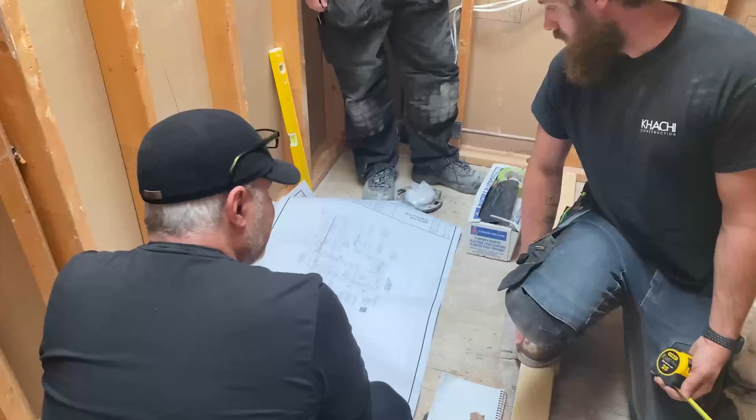Let me give you a recap of where we're at right now. The kitchen design is done, and I feel great about that. There's some refinements to be done, but we know the direction we're going in. The bathrooms have all been designed, and that's complete, so that sets us up for the finishing details. The house is framed, and that is why it's so important right now to get onto the electrical layout and some of the other components that are going to end up inside the walls.

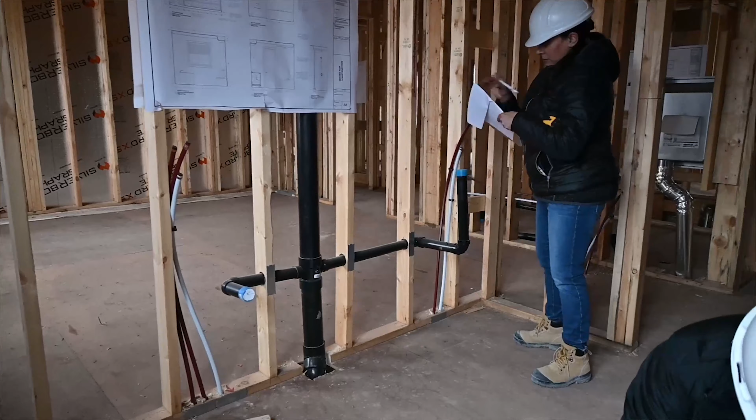Last week, I had a rep from Nuheat out to the house to walk through all the bathrooms because we're going to use the nVent Nuheat system to heat all the floors in the bathrooms. Why? I love the system. It is so easy to use. You get a perfect fit. It's designed for the space. You get even heating underneath your floor tiles, and the system is built in the factory for your bathroom.

So there's no guesswork of figuring things out on site, how you space the wires. It's all factory designed for that space, which is really important. It gives it longevity, great performance. It's very thin, so it doesn't affect the height of the space.

We're going to put a programmable thermostat on each system, and you're going to have remote access to that system. You'll be able to program it and have it go on when you need to, so you get great comfort. What I love about in-floor heating, especially the nVent Nuheat, is that you can zone your spaces. So now you don't have to warm up the entire house in the wintertime.

If you get up early, you can warm up that bathroom and go get ready without really heating the entire space, and off you go. Everybody else may wake up two hours later, which means you can then prolong the start of that heating cycle and save yourself money. It's quick, it's easy, and that's why we're using it.

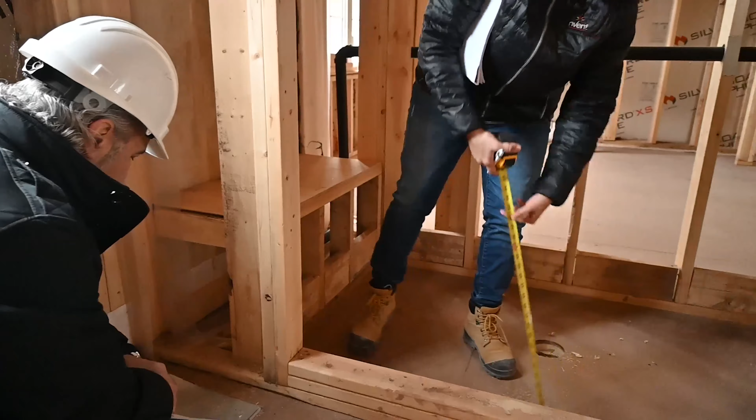So it's designed, we know what the layout is in all the bathrooms. We're also heating all the shower stalls. There's nothing worse than having a nice warm floor and then stepping onto a cold one, so you want to make sure you don't create that scenario. If the bathroom floor is heated, we walk into the shower and it's heated as well, so you get nice consistency.

We also met with Kelly about the alarm system, the cameras, and some of the low voltage stuff in the house. Kelly from APCO Alarms made some suggestions, and we're going to go with a full out alarm system that includes glass break sensors, motions, contacts on all the doors and windows, plus smoke alarms and carbon monoxide detectors throughout the house, in addition to the ones the electrician puts in as per code.

The reason I like that is that if you have a smoke alarm go off, or a fire, or a carbon monoxide issue and the detector goes off, the monitoring station gets notified. So now you've got somebody helping you on the outside. Whether you're home or not, doesn't matter. They will notify the authorities, somebody will come out and take care of things, and that is so important.

It actually saves me on my insurance costs down the road. So from a safety perspective and a cost perspective, it's a great thing to have.

Now we're going to move on to lighting layouts. There's a lot to think about, and I mentioned furniture plan. You can't do a lighting plan without knowing where furniture is going to sit within your space. This goes back to me always saying to people, get a designer involved way up front, because all this stuff needs to be considered. Otherwise, you're going to end up with a house that's not well lit, not properly lit, and it's going to create obstacles for you as you go on to finishing and decorating later.

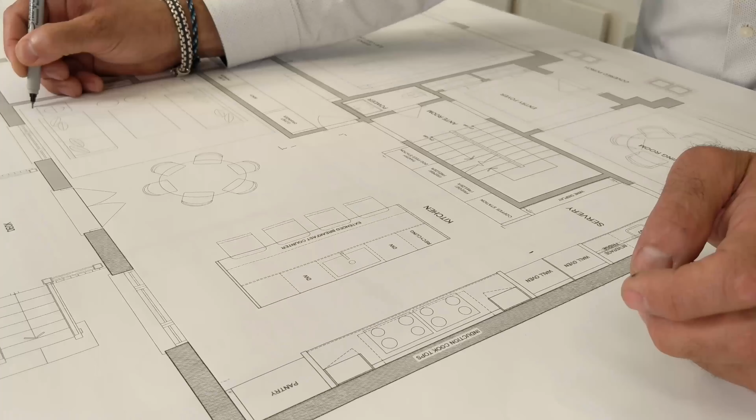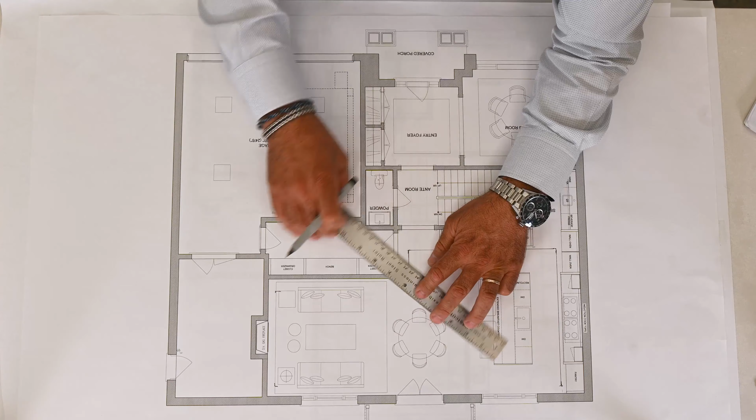But what we also want to do is take into consideration the ceiling height. That's going to dictate how that lighting is going to affect that room. So I'm going to draw in my bulkhead that's going to go around, and you'll notice that that bulkhead carries in front of this servery area. So the servery area is going to have a lower ceiling. That kind of identifies that space a little bit differently than the rest of the kitchen. It's a different space on its own, but it's open to the kitchen, so it gives it its own characteristics and its own perspective there.

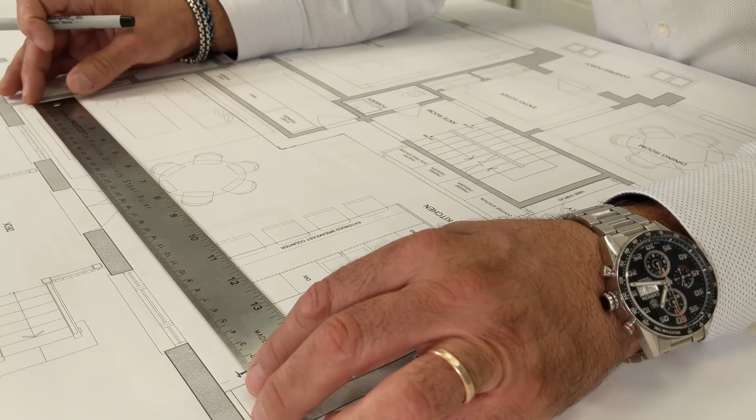So we're going to just draw this bulkhead in. That lets us know the extent of our pot lights and where we can carry them so that we don't get too close to the wall, because if we don't take into consideration this bulkhead, we might put our pot lights a little bit too close to that bulkhead and then the effects will be off. So this is the area we have to work with.

Now I like to lay out all the pot lights first. That's going to create our ambient lighting throughout. Now when it comes to kitchen spaces, I like those lights to be right in the middle. So using trace paper over top is a great way to experiment and then be able to draw things in and correct them if you need to.

Now I don't like to create a runway feel. I don't like it to be too structured because I want some randomness. Too structured is no good. All of a sudden you see the pot light layout just lay out in linear lines, and I don't love that. But we do need lighting in this space.

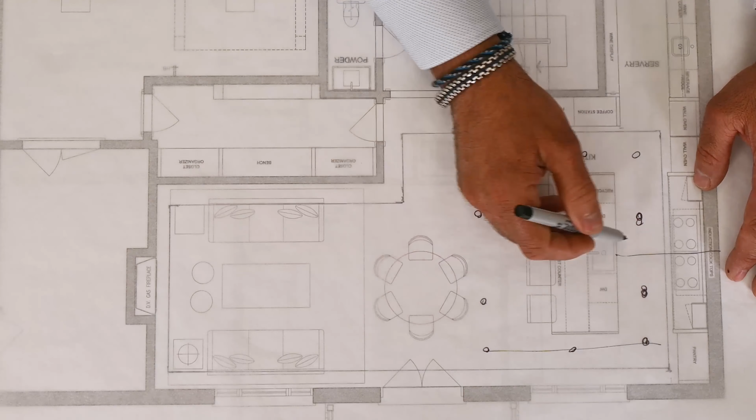We do want to center it within that cooktop area, but I also want to make sure that I end up centered on this area. So when I lay these out, I might move this one over, move this one back a little, and I'll roughly lay them out so that I can then end up with my lighting roughly where I want. And then I'll put another trace paper over top. So this gives me my general lighting in this space.

Then we've got this area that's an eating area. I considered putting a hanging light in this space, but then I want to have the flexibility to move this table wherever I want. I don't want to be fixed underneath that light. So I may just drop

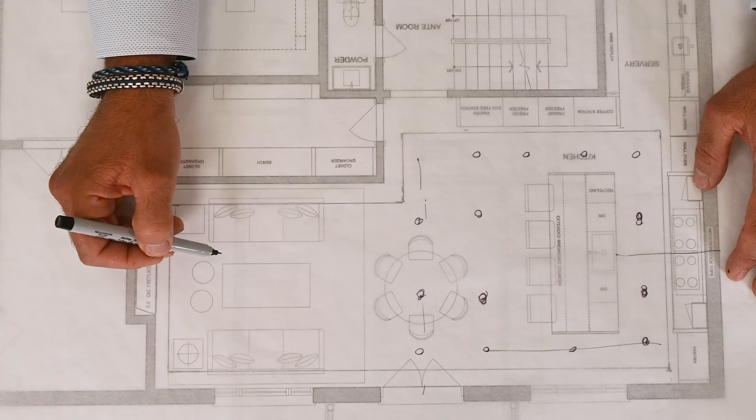More pot lights in this space, and then we've got our family room area. So then here we're also going to drop in some additional pot lights here, and that kind of lays out the space. Now we get a certain quantity of pot lights. We don't have to use them all up in the one area.

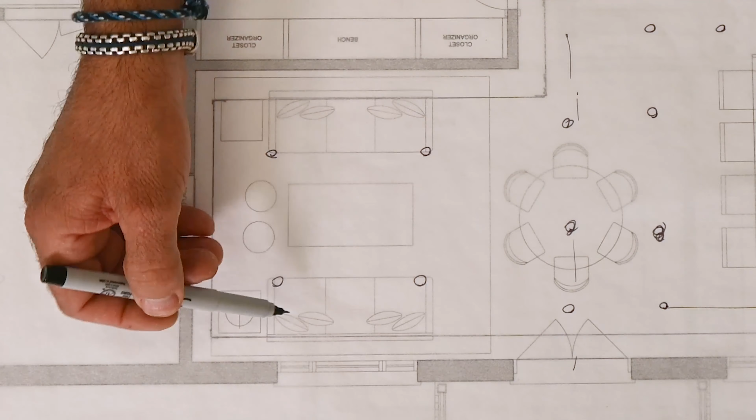We're going to scatter pot lights throughout the house, but there are areas where you really don't need them, and I'll get into those later. This family room area has the seating area with 2 couches, possibly a sectional, so we want flexibility, and I'd love to have a hanging light down in this space.

You'll notice we've got some side tables and table lamps there. If we go with a sectional, we'd end up with a table lamp there. If we go with 2 couches, maybe we'll end up with a table lamp here, maybe one on either side. Nevertheless, these will have to plug in somewhere, so I'm going to put a receptacle back here, and I'm going to run this receptacle and switch it separately, but we'll get to that in a second.

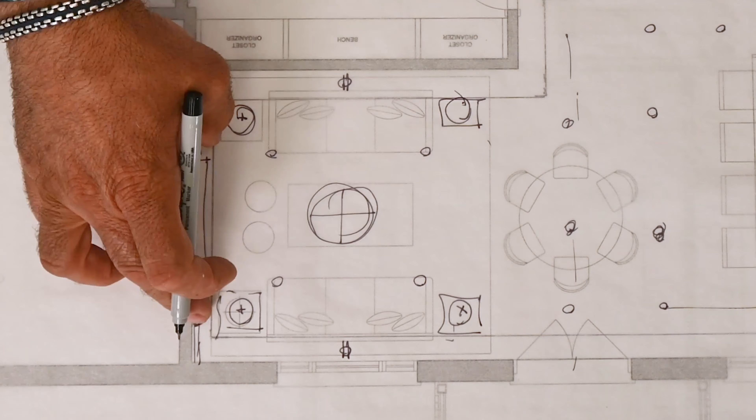Then we've got this fireplace area that comes out, with this mantle and these 2 mirrors on either side, and we're going to put a wall sconce on each. This becomes our accent lighting in the background, and as we come across, we've got some accent lighting in this area over top of the island as well. Whether these are hanging lights or linear hanging lights doesn't matter, that's to be selected.

So this lays out our lighting area in here, and then we need some more ambient light in this space. We've already got, as part of our cabinet drawing, some secondary accent lights here, and under cabinet lights here. Then we've got our coffee station that's also going to have some accent lighting inside. All of a sudden we start to create that balance. Then we look at other areas and all the switching.

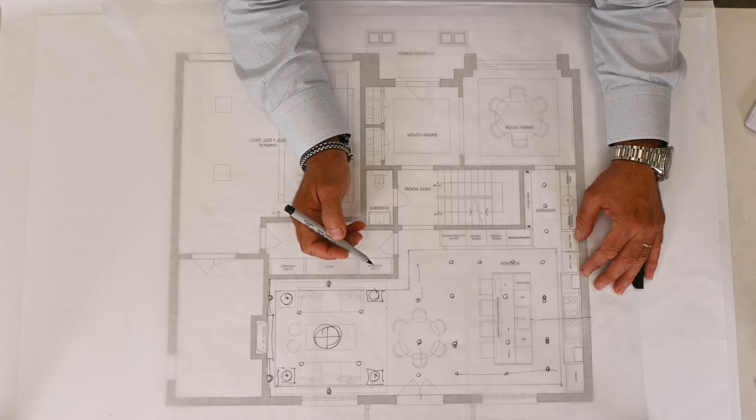Then we move on to some other spaces. We've got this ante room here. I'm going to put 2 pot lights in this space, because one will not be enough. We want to consider the spacing within our pot lights — you don't want them too far apart, you don't want them too close together. It's 10 feet high, so you'll get good spread on those pot lights and good general lighting.

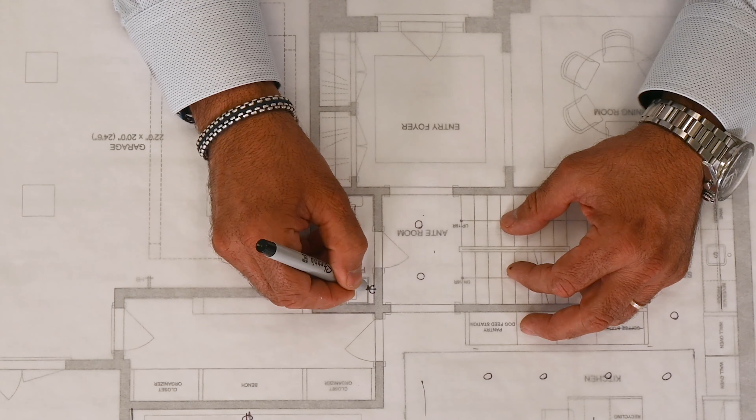We've got our powder room here, which I've got the fan drawn in. I'm going to move the fan to the middle, and actually put a pot light over top of the toilet — it creates a little bit of accent light there. Then I'm going to put a wall sconce on either side. I love having side lights on a vanity, because the light reflects off the mirror and onto the person, giving you nice even lighting.

This mudroom area will probably end up with one light fixture in the middle here, and this is a perfect example of not wasting pot lights in this space, because I can easily put a linear light here and give great lighting to this space. No need to waste our pot light counts in there.

Then we get into the foyer, same thing. I can do a beautiful chandelier in the foyer and avoid using up pot lights in this area.

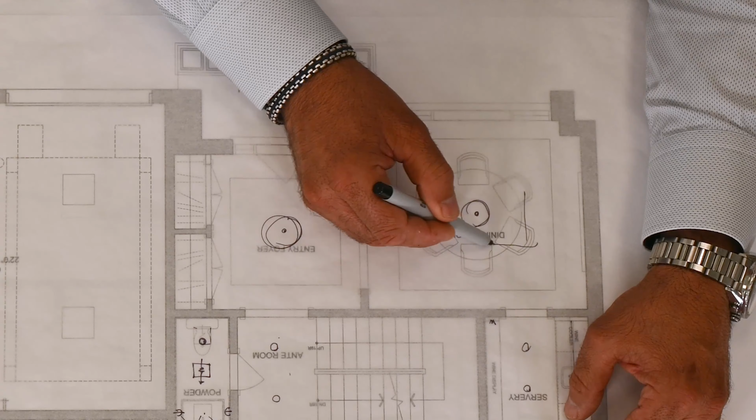Then we get into the dining room. Obviously we need a nice hanging light in the center, but I love to accent that with some secondary lighting. Now we've got a round table drawn in, but I've made my mind up that I'm going to reuse an existing table that is rectangular. So that table's going to go here, and our seating's going to carry around like this. So I'm going to put in a pot light here, one here, one here, one here.

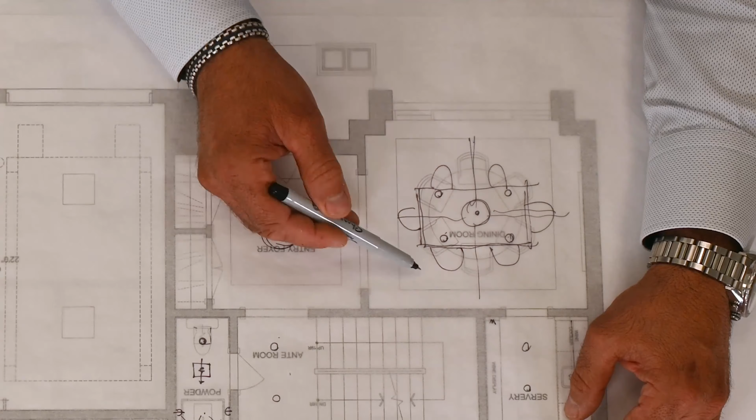What I do want to do is start drawing in the architectural elements that are going to go on the ceiling and some of those details, to make sure these pot lights relate well to that detail on the ceiling. We do have our bulkhead, but we want to go a little further with this. Having said all that, let's throw another trace paper on top and start cleaning this area up, so we can clean up our lighting layout and then get into how all these things are going to connect and switch on and off.

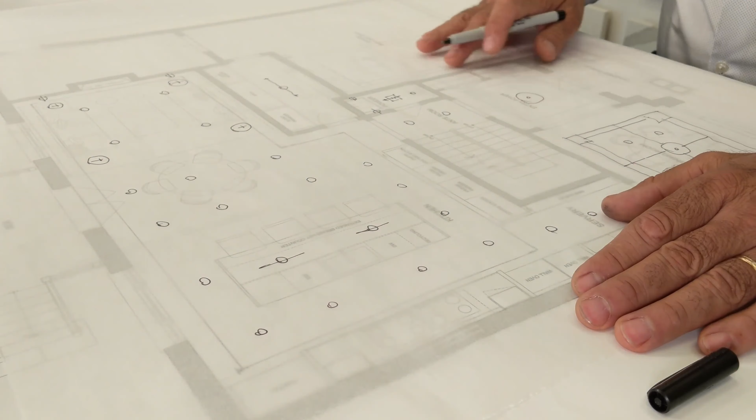Okay, so now we're going to pull out the old piece of trace and end up with the new one. We'll line it up, and you'll see we've got all our lighting laid out in the right places. We've got this area where it goes downstairs and upstairs, and I'm going to have one light hanging above that transitions into this space. Then when we get upstairs, we'll deal with the pot lights up there.

And then we've got our garage lighting as well, with 4 fixtures on the ceiling. With regards to our garage space, we know already that we have a landing coming down here, so I know there's going to be some steps, and I need a light fixture here.

So there we go. Now, when you walk in, how do you function with turning these lights on and off? That's what you have to think about. When you walk in here or when you walk in here, how do you switch things on and off?

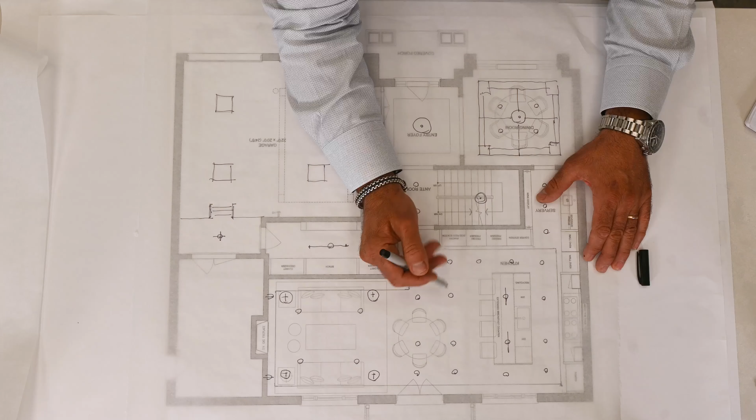Now, what we like to do is look at all the groupings of light that we want to control together. I might pull these in a little tighter, but I'll do that on my final drawings when I get onto AutoCAD. So we know this grouping is 1, because if we're cooking, we want this area to light up. We start to look at how these run off the same circuit branch, and they're connected, and they'll go to a switch right here.

That's one switch. Then we know we're going to run these together onto another switch. That's 2 switches. We know we want these circuits together running to another switch, and then we've got these 4, and I forgot my chandelier, so we're going to loop these together and come around to another switch.

Then we want to make sure we operate those receptacles back here behind the couch off a switch as well, so with a switch you can turn on your table lamps. So this receptacle and this receptacle, we'll loop this over and then come there, and then we have these 2 wall sconces that will also

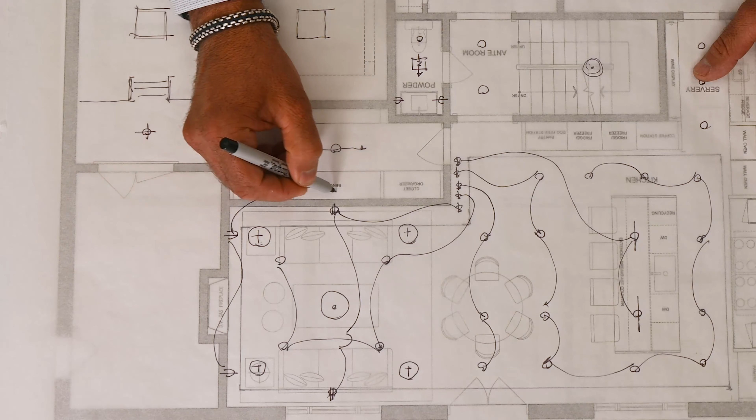come here. So we've got 1, 2, 3, 4, 5, 6 switches, but that's not all. We've got this area here. We're going to need another switch to operate those.

And then we've got our accent lighting, which is our cabinet lighting, and our under cabinet lighting here. And then we've got our coffee station with more lighting, so we need another switch to operate those, and we have to know how those are going to be operated. They're going to have a transformer, which we'll put on top of this cabinet, so we'll have to make sure there's a receptacle that is switched. I'll do those on all the drawings later.

But you can see how this all starts to lay out, and we've got banks of switches. You got 1, 2, 3, 4, 5, 6, 7, 8 switches on this wall. What a nightmare. How ugly would that be? Okay, we'll address that in a second, but let's carry on here.

And then we've got these two to light up. We've got a foyer light to light up. We've got our outside portico light, plus any lights on top of the garage that we want to deal with to light up, and then our dining room.

So let's look at, the dining room is going to be managed here, where we've got our pot lights switched here, and we have another switch here that'll run this center light. So 2 switches for this area.

Then we need a switch to run this guy. We need a switch to run these 2. We need a switch here to run this. We need a switch here to run these guys.

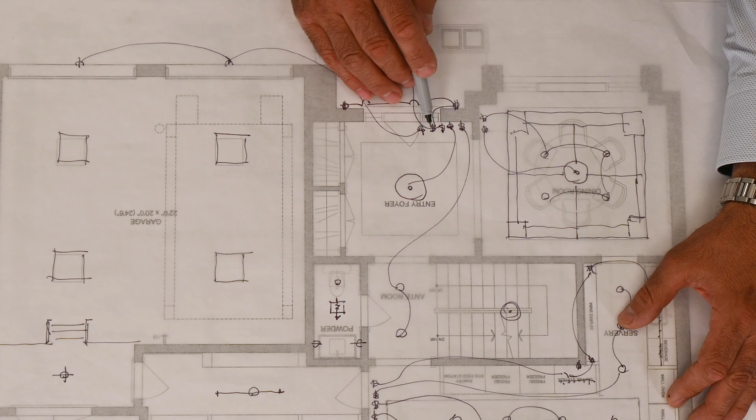So again, you can see 4 switches at the front door, and that's not all, because we've got plugs outside that are going to be switched for things like Christmas lights or holiday lights. So we've got another switch here that's going to run these 2 lights, or receptacles. So all of a sudden on this wall, I again have 1, 2, 3, 4, 5 switches.

But this starts to really give you a sense of where your lights fall into place, taking into consideration ambient light, task light, and accent lighting on the sides. Now, if this was a true custom build, we'd get into some uplighting and additional lighting, which gets a little more complicated, but with a tract house or a mass-produced house, it gets too complicated. We're not going to go down that line.

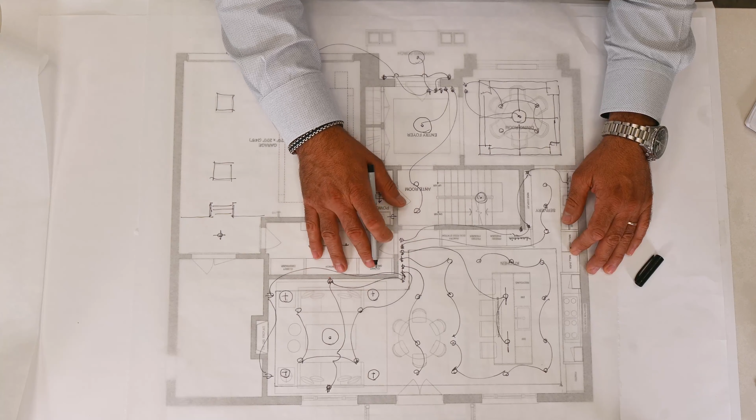We also have a switch out here for the garage, the mudroom, and all those areas. So we're going to run a switch to operate these, and we're going to make it a 3-way switch to maybe shut that off as you're going out as well.

And then we've got a switch to run this. So we've got to consider some more details here. But let's get on to some of the other floors.

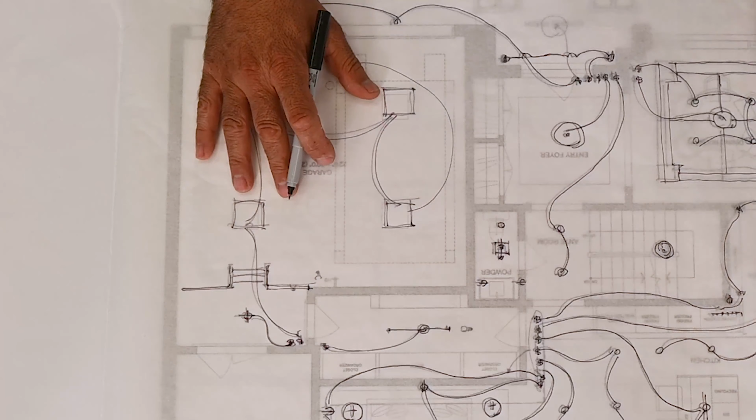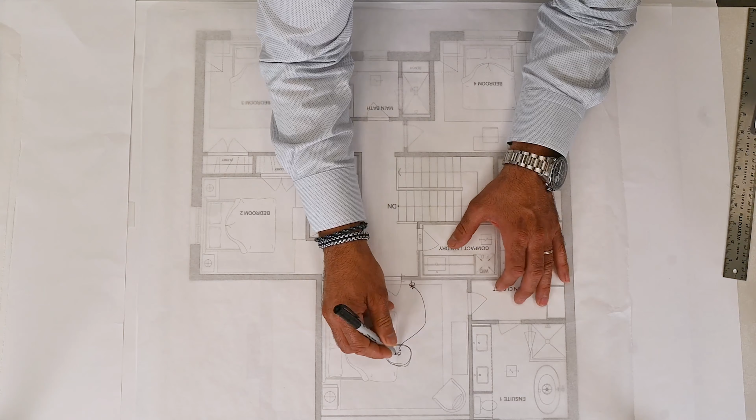So we've got the walk-in closet. As you walk in, you want to make sure your switch is here, and we want to put some kind of lighting here. I'd love to put some linear lighting here, and if these are low voltage or line voltage, meaning 110 volts versus 24 volts, if we're going to go into a 24 volt system, the transformer is going to have to sit somewhere else and plug in.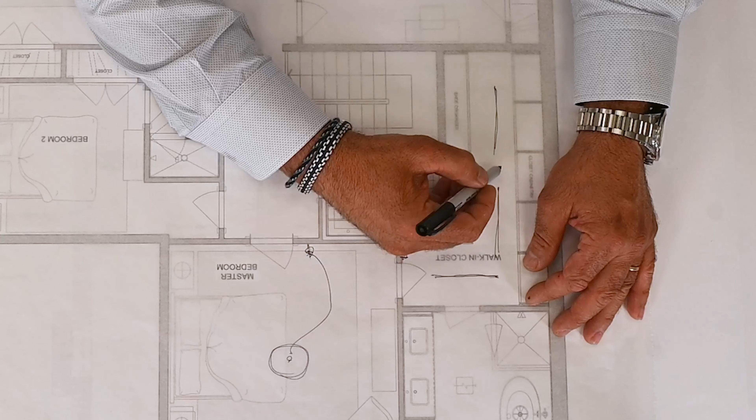So why don't we do that? Why don't we run this with low voltage wiring and run that here, and then put a plug that's connected to this switch, and then everything can sit on top of this cabinet. Then you've got your ensuite here.

This ensuite, lots happening in here, because number one, we've got a rain head. Have to consider that. So you got a rain head right down the center. Well, where do the lights go? When we have a rain head, I love to center 2 lights on either side.

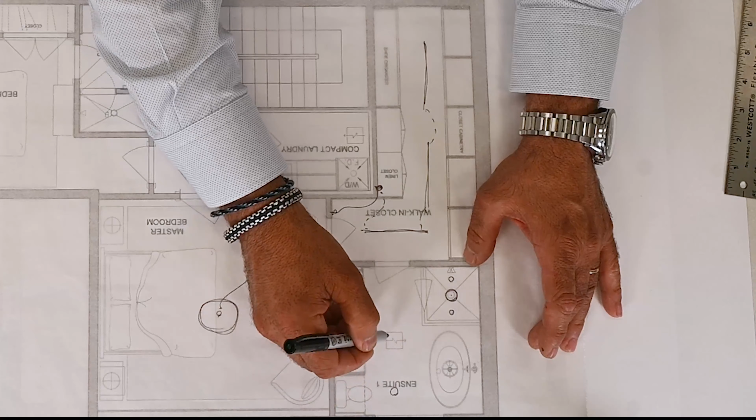Then we've got some general lighting here, so we'll probably put some pot lights, maybe just run 3 down the center here, probably move this fan over and run 3 lights here.

And then we've got the vanity area. The vanity is, again, very important. I love to have lights surrounding you. So what I think I will do is go for a wall sconce on either side and one in the middle. That gives you good lighting around each person.

And then lastly, I'd love to do an accent light over top of the tub. Now, I don't necessarily love pot lights over the tub. Even an accent light, I don't want it to have a ton of lighting, because you don't want to be on stage when you're taking a bath. You just want to be able to dim that down and have just accent lighting in that space.

Then we got to get into switching. So that's a lot of circuits. 1, 2, 3, 4, 5 circuits. That's 5 switches here. So we got to see how we're going to group those as well.

So we'll have one switch that will run probably this pot light along with that one. Then we're going to have another switch that'll run the fan. Then we're going to have another switch that will run these pot lights, another switch that will run this light, and then another switch that will run these lights. That's a lot of circuitry.

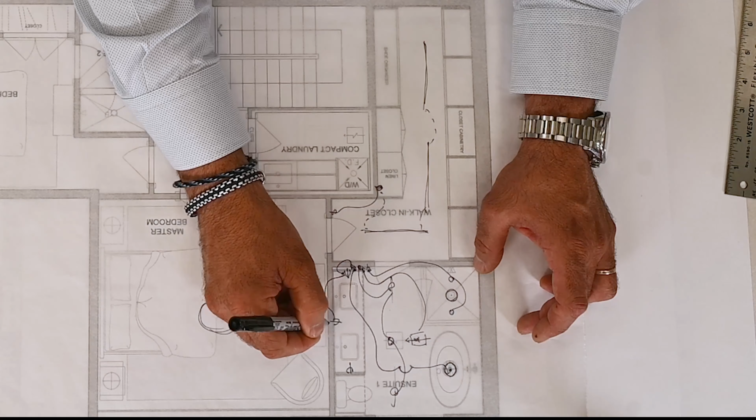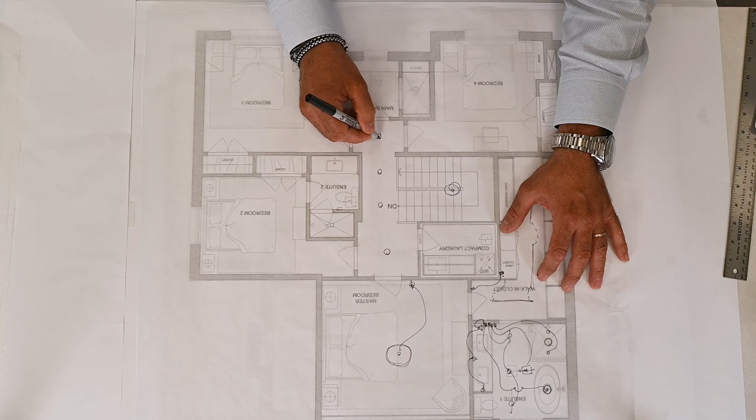So that's how it all starts to come together, and let's do the rest of these rooms and pull them out. Same concept, single light fixture in each. Again, we don't want to waste all our money and all our pot lights in these areas. We'll do general pot lights in this space. We've got our hanging light here, and that's enough. So I'll probably do one pot light here, maybe two here, and maybe one more here, and then address all of these.

So this is one area I want to point out. When you have lights up here like this, you want to make sure that you can control these from downstairs and upstairs. So we'll have a switch here, it'll turn these on, but there'll be another line that goes downstairs that gives you a three-way switch downstairs.

Same goes for this guy. We know we have a switch down there that's operating this, but what we want to do is be able to draw one up here to come and put another switch here, three-way, to operate that.

Bedrooms are laid out. This bathroom here, we want to put a pot light in the ceiling. We do have our fan that we got to control, but here I'd love to do two pendants that come down from the ceiling, just hanging right here on either side. It'll reflect light off the mirror, and that's a great way to light that. It becomes a little bit different and unique. This one, again, same thing, a pot light right over top of the rain head we want to center.

Our fan is right here, and we want to make sure we have good, adequate lighting here. This is a bathroom that Jaden and Haley are going to use, and I want them to be able to see as they go into the bathroom.

So we're going to have a night light system here. We're going to have the mirror floating off the wall, and I'm going to put LED lights all the way around that mirror. We'll have one switch that lights the pot light, one switch that lights our fan, one switch that lights our LED lighting, and then we'll put a linear light here on the mirror with another switch for that.